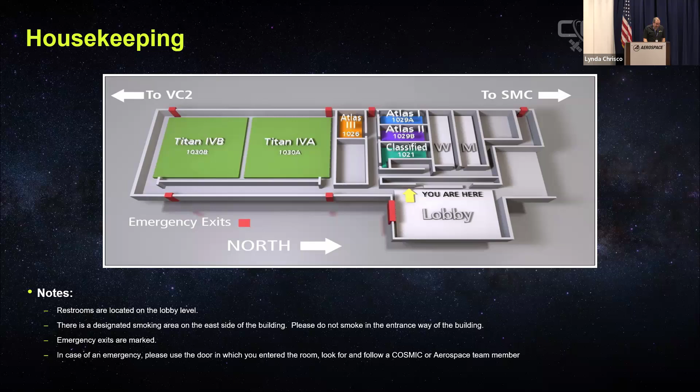I'm sure glad I'm in Colorado. Well, it's funny because, if you were on yesterday, the San Diego State students were here and their campus got rocked. It wasn't a huge earthquake, but it was big enough that it probably knocked some books off the shelves.

That's yesterday's schedule. Today, we're opening up with 2 teams from the University of Texas. The first team is Zenith Engineering Solutions from University of Texas at Arlington. And after them is the Miners from the University of Texas at El Paso. And this afternoon, we have a couple remote teams, and then Space Bender from right here, Cal State Los Angeles. Tomorrow, you can see we have 9 more teams, so it's a packed day.

If you're there, there's tours in the morning. You would have gotten emails from NASA about those tours and the rest of the event. But you can see there's actually 6 teams presenting in person tomorrow. I think this one is out of date. I believe one of the later Penn State teams is also presenting in person.

Okay. Cosmic background. We did this yesterday, so I'm going to do the abbreviated version. It's a consortium that's been established to bring together the community interested in space mobility and ISAM. Workforce development, that's the group Joey and I lead or facilitate. So far we've been mostly focused on C3, but also helping provide resources for people to learn more. We're looking at starting to develop this year an ISAM mini course, a self-paced curriculum so people can learn more about ISAM in a more organized fashion.

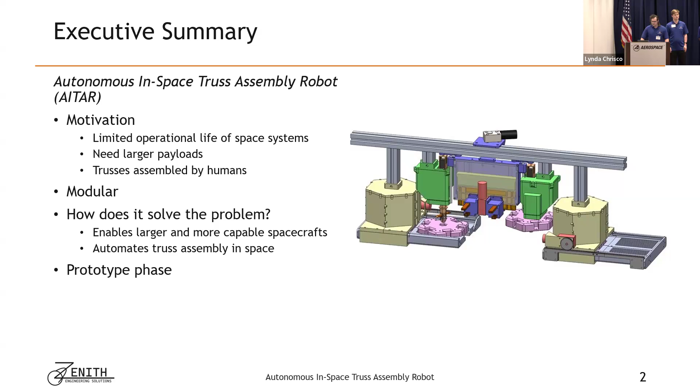Here's the team. From left to right, we have Spencer, Nevin, myself, Ethan, Nicholas, and Juan. We are all undergraduate seniors in mechanical engineering, and so our project is very much geared towards mechanical engineering.

Here's a timeline of everything that we've completed. To give you some preface, our senior design capstone project is structured in a way that our first semester is exclusively conceptual design. We finalized our conceptual design of the AITAR, as we are calling it, on November 21st. Starting this semester, we began to develop the entirety of the prototype, as we will see in the rest of the presentation.

The impact. We chose to focus on truss building because it's a clear gap between the vision of space infrastructure and the current state of the art. Huge constructions in space could play host to many functions and support work in space, such as the future Artemis missions and putting a man on Mars. However, the difficulty and expense of manual truss construction in space means that structures are limited to what can fit within or fold out from a rocket's payload fairing. We aim to realize the vision shown here, with in-space construction yards facilitating greater scope for the future.

This is the envisioned operation of our robot. Shown here is the digital twin that we've generated in CAD of the prototype, and we'll get into it further later. It can be launched into space and build a truss structure as large as needed. Once the structure is complete, the robot can return to Earth to be recovered and reused. Once the truss structure is built, it will be freed from the bus and can be utilized by whatever is in need. Shown here is the animation of our conceptual design.

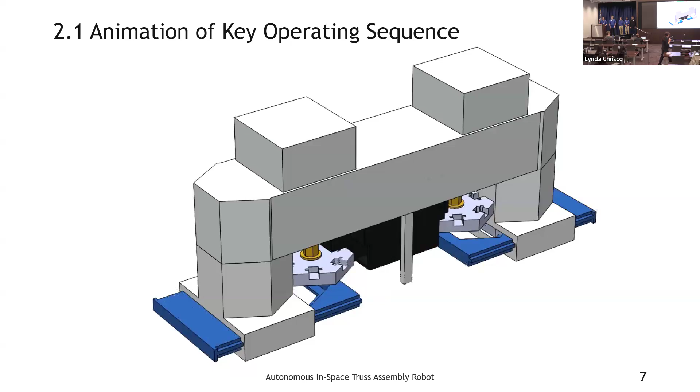You'll see the torque arm assemblies grabbing each truss element that we're calling the node and placing them into the build plane. Then the beam magazine in the center will lower down, place the beam between the two nodes, and use induction welding to fuse the thermoplastic members together. After that, the torque arm will then rotate the assembly and add another beam as needed. This can be continuously expanded as we have evacuated the build plane to build larger and larger structures, as long as you have materials to support it.

Here's the conceptual design broken into its sub-assemblies. In the blue, you have the node magazines storing and dispensing the nodes themselves with a tray mechanism. Moving into the yellow structures, we have the torque arms, the most complex of the sub-assemblies. This will be lowering a torque arm into the socket hole of the nodes themselves and then affixing it with tabs on the end. This will allow the nodes to be moved and also allow locomotion of the robot on the truss structure. In the center is the beam magazine. This is what will hold and weld the beams into place.

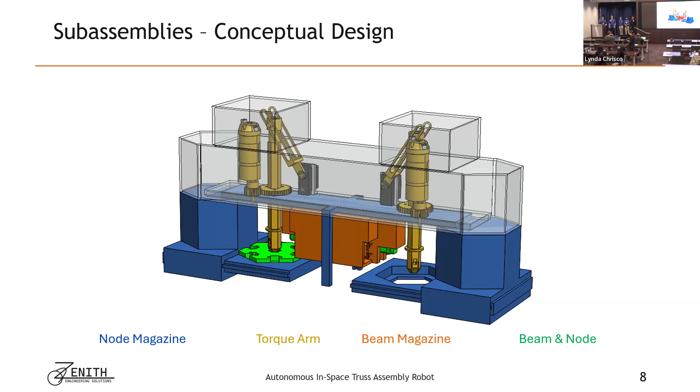It should be noted that the entire structure has been decidedly made out of aluminum 2024, as it is commonly used in space applications for its lightweight and high strength to weight ratio, as well as reduced fatigue. Now Spencer will start breaking down the sub-assemblies.

So this is our conceptual beam magazine as of November. Its job is to store and install the beams onto the truss assembly. It has a servo motor which rotates these pegs that you can see on the inside to isolate the beams, so as to have only one beam installed while keeping the remaining beams inside the magazine. It's translated using a ball screw and DC motor to move it up and down.

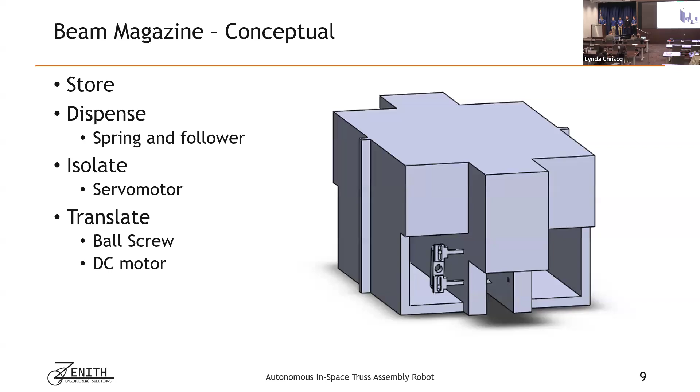This is a CAD model of our prototype, and instead of a servo motor, we used a dual shaft DC motor shown in red to control the pegs, and this was because the servo motors that we did have were too low power to counteract the force of the follower mechanism. Additionally, we used a rack and pinion mechanism as opposed to sliders for the pegs in the beam separator module because it's mechanically simpler for us in the prototype. We also have in orange these stabilizer brackets to prevent the magazine from twisting when the lead screw actuates.

And we have a video here of the magazine being actuated up and down with a lead screw. And for the prototype, we used a plain lead screw instead of a ball screw because of the lubrication requirements needed in atmosphere. And we also have a video of the module in action.

And as we can see, as the rack moves, it allows a beam to come into the loading position, and then that motion would occur right before it's lifted up, and then another beam is ready to be placed. And I'll hand it over to Nicholas.

So, the node magazine is used to store and dispense the nodes into position for the torque arm to retrieve them. It, like the beam magazine, uses a spring-loaded follower system to push the nodes down into the slot in the feeder tray, which is then actuated by a ball screw to move into the position underneath the torque arm.

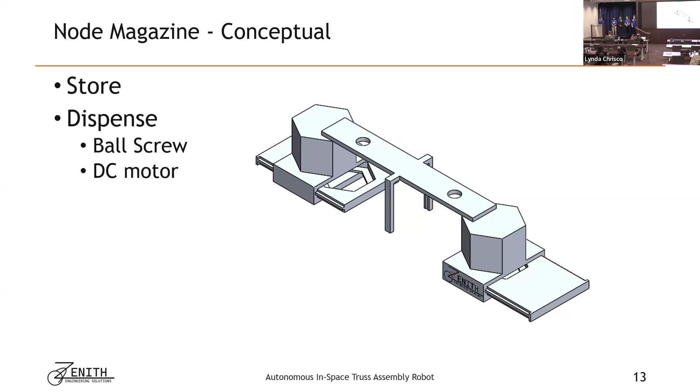For our prototype, we've had to make a few adjustments due to the complexity and expense of the ball screw. We've swapped it out in this on-the-ground, in-atmosphere version for a rack and pinion system. And then the follower is pulled down by a single constant force spring at the back.

And then the force is counterbalanced by bearings, 2 sets of bearings around the follower assembly, which ensure its continued horizontal position. And then there is also a cutout in the feeder tray to ensure that the torque arm can easily pull the node out of the feeder.

And then here we have a video of the feeder tray in action. Here the motor is going at 100% speed. It is much slower on our finalized and computer-controlled prototype.

The torque arm is the most complex subassembly in the robot. It must slot into the nodes that we use for our truss, secure the nodes, and also raise the nodes out of the feeder that slides out, slide them into the build plane, and then rotate these nodes in order to locomote across the truss.

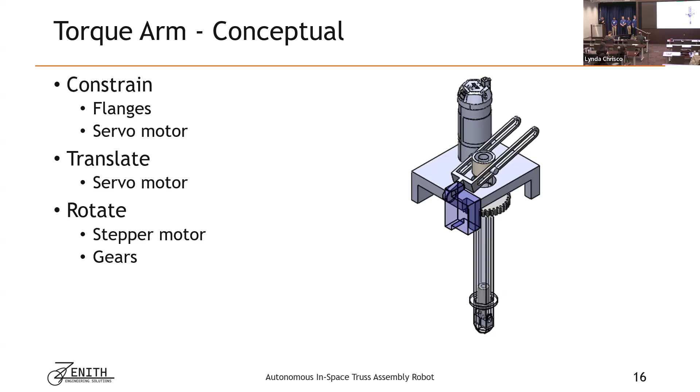Here's a picture of a CAD of the prototype. You can see the 3 motors that drive the torque arm: a servo in the top that actuates the flanges to secure the node, a servo in the pallet fork raises and lowers the arm, and the stepper motor connects to the gearbox and rotates the torque arm shaft. We learned that using a servo placed in the cab of the torque arm is most likely the best design choice for the final assembly.

Okay. So this is a video of our prototype of the flanges actuating.

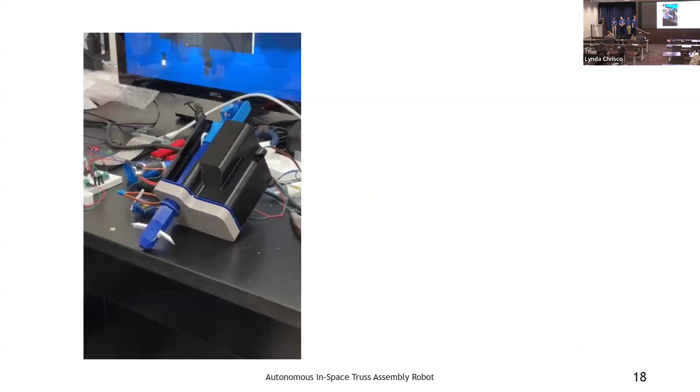You go back. Not in this one. Okay. I'll pass it on to Nevin to talk about the truss element.

The beam and node shown here form our truss structure. The node, which acts as the joint, has slots at 60-degree intervals so that we can form an equilateral triangle. They're both made out of carbon fiber reinforced PEEK. And we chose this material since it is resistant to microcracks from thermal cycling, has good resistance to degradation from radiation, and it is also a common material that is used in space applications.

The beams and nodes are joined together through induction welding. And the beam has metal implants, which melt the thermoplastics during the induction welding process. The method of joining is achieved using magnets in the prototype as compared to induction welding. We deem this more reasonable for prototyping, as we are just demonstrating the mechanical operation.

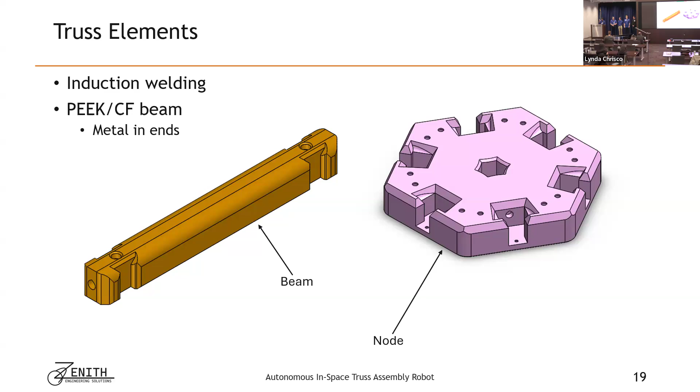So, now that we've seen all the individual components, we can look at how the overall assembly fits into the requirements of the competition. The conceptual design, without the rescale and any changes made to the prototype, fits well within the payload volume of the Venus-class bus. The mass is also well within our bounds.

The maximum power draw, which occurs during the induction welding operation, exceeds the maximum power supply of the single-wing bus, which we've designed our payload volume for. Therefore, we will use a supercapacitor to provide the excess supply for a momentary period in which the induction welding occurs. However, the regular power draw for all other operations does not exceed the 15 watts used in the torque arm rotation.

Our analysis of the conceptual elements also shows that they can withstand the forces of launch. We have three operations we selected to combine, namely the dispensing and alignment of our nodes and beams, their joining using the induction welding, and the robot's locomotion along the truss, all of which combine towards the larger truss construction ISAM capability.

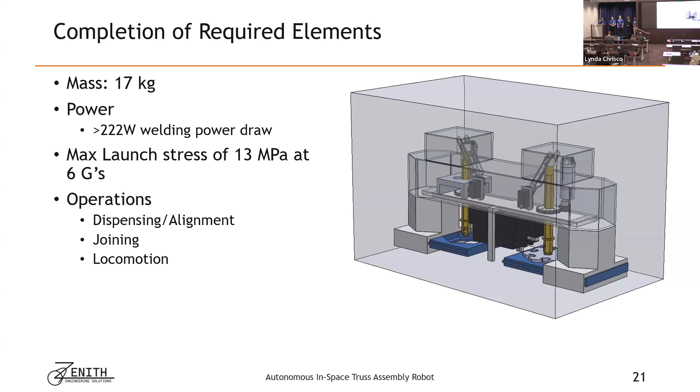Building the autonomous truss assembly robot is highly feasible due to the components used being fairly well tested and understood in terms of their history in space operations, and they're easily available. The basic operations have also been proven through the kinematics of the working subassemblies that we've built for our prototype. And we believe that it's a simple matter of programming it for automation, which means that overall, the design in total is easily feasible within the decade.

Building the autonomous in-space truss assembly robot within the decade. Oh, hold on.

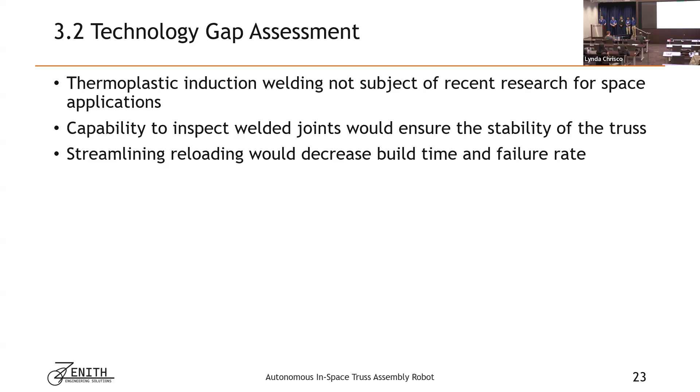Even though the mission is feasible, additional technologies could make the mission more effective. Welding of thermoplastics in space is a novel idea, and further developments in this area would improve the confidence in the mission. The ability to inspect joints, as well as reload the truss elements, are additional technologies that would amplify the impact of the mission. However, none of these technological gaps make the mission unachievable.

Some of the technologies that we tested or looked at for joining were fasteners, ultrasonic welding, adhesives, snap fits, and induction welding. We were considering snap fits for the majority of the design phase, but we abandoned it due to the strength of snap fits being low and their reliability in autonomous programming being low.

We ended up going with induction welding as it requires no tool contact on the weld surface. It uses EMF to heat the metal inserts inside of the beams. And this leads to a simple automation process. However, even in atmospheric conditions, induction coils require water cooling.

For linear actuators, we considered lead screws, rack and pinion mechanisms, and ball screws. The lead screw and rack and pinion were ruled out because they rely on sliding friction, which just is less effective and would affect our reliability in our system. Instead, we selected ball screws, which is an industry standard for space applications.

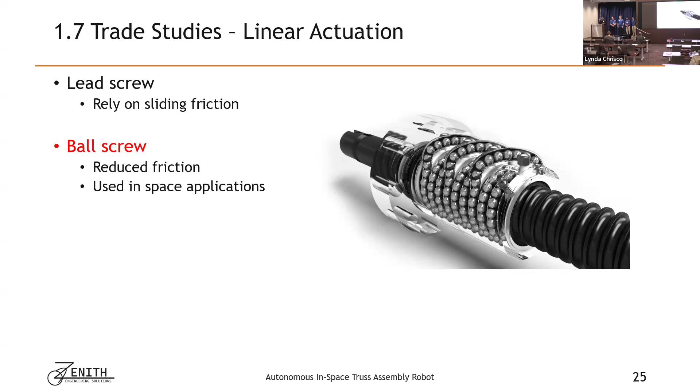Autonomous assembly of structures is not new when it comes to space missions that are under development. However, ATAR utilizes a unique assembly and locomotion operation that is significantly simpler than current assembler robots. The ATAR is also designed for on-orbit assembly as compared to building structures on celestial bodies. And it also utilizes induction welding of thermoplastics, which is a novel idea when it comes to space missions.

Some of the most innovative ideas that we considered include the ability to capture and deorbit satellites that had lost communication, repairing or replacing solar panels, and induction welding of thermoplastics. The complexity of satellite commandeering as compared to its need led us to not pursue this idea forward. And when it came to solar panel repair, there was a lack of interest in proposed solutions, which led us to not move forward with it. On the other hand, induction welding of thermoplastics is an idea that we incorporated into our mission.

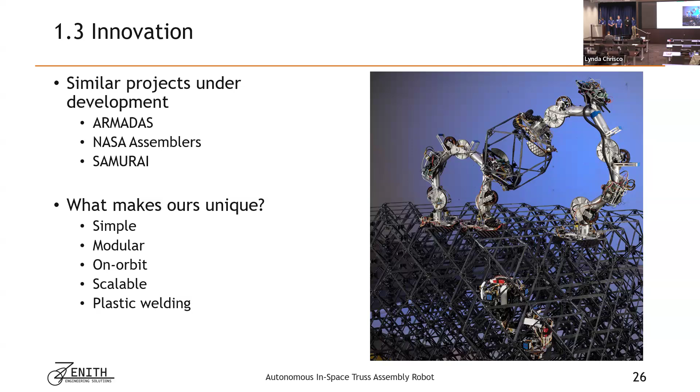All right. Risks associated with the robot's operations were ranked based on severity and likelihood of occurring. Misalignment of nodes and beams ranked as the most probable and severe, since this is mission critical and currently lacking closed-loop feedback. The failure of different actuators ranked separately, as they all have different actions. The failure of the torque arm would be catastrophic because, in addition to the mission failing, the robot cannot be recovered.

Impact of space debris has no designed countermeasures, assuming the debris is large and fast, and for this reason ranks high in severity. Electronic operations are commonly interrupted due to radiation in space. However, this is commonly remedied by the use of redundant systems.

Regular wear and tear ranks the least probable and severe, since the robot will only experience this after a long period of time, and the effects won't be detrimental to the operation itself, due to the fact that we are going to just bring it home and maintain it, similar to an airplane. Events considered in regular wear and tear include off-gassing of lubricants and material degradation in space over time.

The data handling and comms is really quite simple for our robot. It does not require any real-time activation, could be constantly observed or piecewise depending on the operator, and the operator is only needed for initialization and updates if desired. This allows a low bit rate. Through brief skimming of systems, we determined the AstroDev Lithium 1 to be the best choice, with 9.8 kilobits per second at 48 grams and a low power draw of 1/4 to 4 watts of power.

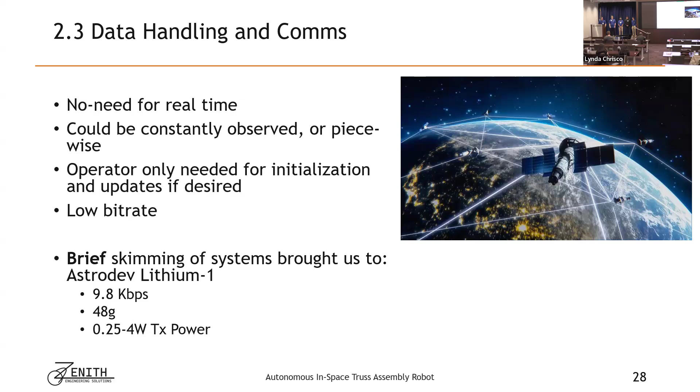The biggest challenges that we encountered during the first stages of development were: we realized that the assembly is interfering with the truss structure and inhibits expansion. This issue was resolved by designing the robot in such a way that all parts can be evacuated from the build plane. An additional challenge was the high power required to weld metal trusses, which was later replaced by thermoplastic truss elements. The low power specification caused some worry at first and led to the development of a robot that can operate in separate stages to prevent high power consumption.

Shown here is one half of the full prototype design. On the left, you see the node magazine. In the center, the torque arm, and on the right, the beam magazine. We're currently implementing new systems, or the same systems but getting them to work, and we have another 3 weeks to make sure that this is fully operational.

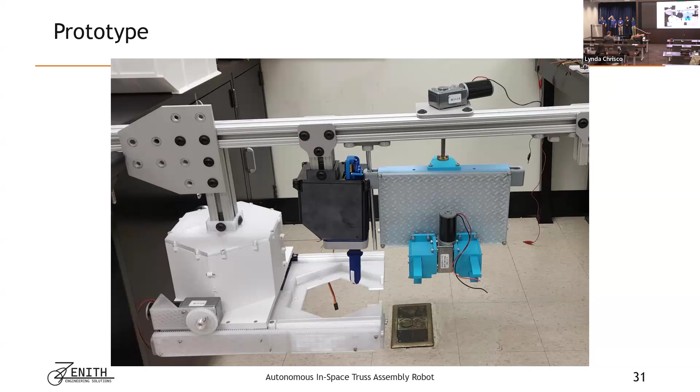Our paper further details our decisions and motivations behind each thing, as well as detailing the trade studies that we performed. The abstract is 163 words and the entire paper is 13 pages long, where we reference 26 works.

The path to PDR shows that we plan to design the launch configuration for the robot to fit within the bus itself, add disassembly and reloading functionality in order to increase the use of the robot, and do true environment testing so that we can understand the resistances required for the locomotion of the robot to not inhibit any movement of the bus and the truss structure, and to understand further the thermal loading and strategies to adjust for such. Also, we would need to rescale this prototype to fit within the bus and assign space-rated motors, as well as adding closed-loop feedback.

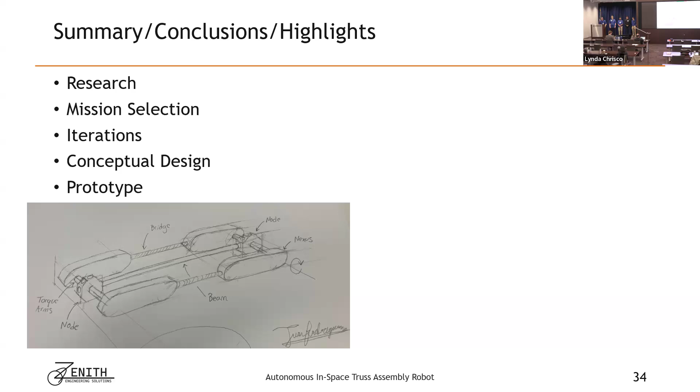In summary, the team started out by researching the space environment and getting familiar with ISAM. After gaining some insight into the current state of ISAM and a general idea of the space environment, the knowledge was used to select a mission that was novel, feasible, and applicable. Once a mission was selected, the design was refined through several iterations and landed on the conceptual design. A prototype of the conceptual design was built while making changes to facilitate this process. Shown here, you can see the initial hand sketch, kind of back of the napkin, on the first day that we thought of this idea, all the way to the final digital twin of the prototype shown above. Are there any questions?

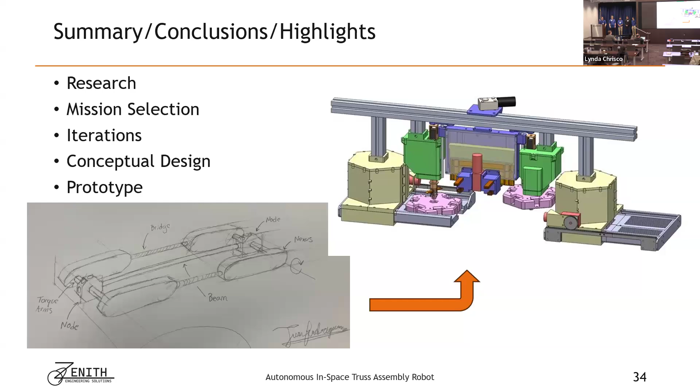Okay, let's open it up to the judges for questions. Hey, I'll go first, if that's okay. So this is Lieutenant Griseric. I work here in Space Force.

I asked a similar question yesterday, but is there any consideration of what you'd have to change about the payload design to work in LEO versus working in GEO? Let me repeat the question so I understand what you're asking. Was there consideration of the differences in design for working in LEO and GEO? Is that correct? Yes.

So we found that in LEO we have a much higher temperature fluctuation as well as radiation bombardment, although that's about the same. When it comes to the temperature fluctuation, it would fall in the same idea. Considering the aluminum 2024 is well tested and holds up well to fatigue, we did consider a different material, aluminum 7075, but we're not sure that it would be much different. Overall, I'm not sure that the design would have to change all that much, as the truss structure itself would also hold up well against radiation bombardment, as we see very little degradation of the material. Does that answer your question?

Yeah, great answer. Great presentation too. Thank you. Thank you so much. Hey, yeah, guys, if you... go ahead.

Yeah, so the question I have is, you're clearly using magazines of your material. Did you guys discuss the options for reloading those, or have you thought through any of the options to make sure that you don't get limited on orbit? Yes, so we did consider different abilities to reload nodes as well as beams. We figured that is a very obvious path towards the next consideration, and it seems very feasible, as you can just add some sort of a gate check valve mechanism.

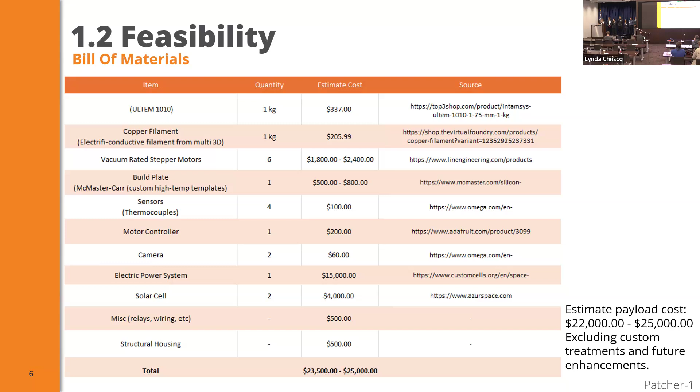For instance, the PEI substrate offers thermal stability and printability, while our conductor material was chosen for high radio frequency performance with lower power demands. In addition, we estimate the cost of the antenna measuring 6.5 by 5.5 centimeters at $26.81 per unit. The dual-use robotic arm not only prints but also positions and installs the antennas, which helps reduce mass and simplify mechanical systems, optimizing power efficiency.

For innovation, I would like to demonstrate different technologies that we found that can demonstrate what we want to do. So there exists a company called WASP that integrates 3D printing technology into the robotic arm. So we know that this is feasible. Also, we found research into fully 3D printed patch antennas. So we know also that patch antennas work.

And we found very interesting research on the proposals of Mitsubishi Electric. They propose an antenna; they can make one antenna out of resin in space. And there are other similar proposals that manufacture large components. So the novelty in what we want to do is we will have the robotic arm that will be capable of gripping the patch antenna and installing it.

To make sure we meet the required elements, as my teammate said, we selected the dual array, which we had that constraint of volume, and we created a CAD model to make sure everything fit in that space. Also, we decided materials for the robotic arm, and we encountered the mass for the filaments and extra materials that we're using. And we met also the requirement.

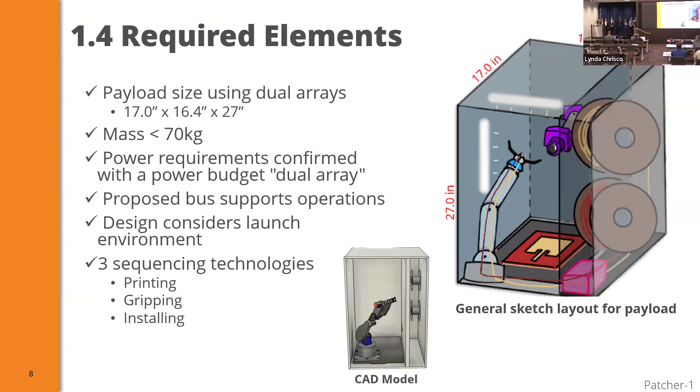The other one we would like to point out has a low likelihood of occurring, but also has a high impact: when our deorbiting mechanism could fail. So the way to mitigate this one would be to make redundant deorbiting systems to make sure that it is very reliable.

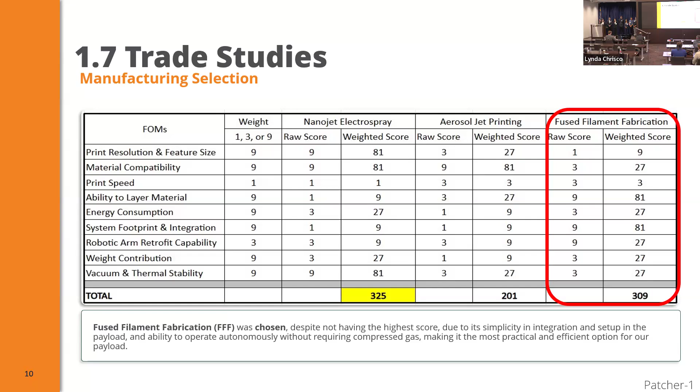After deciding on the fused filament fabrication method, we needed to concretely decide what antenna we wanted to make. Feasibly, we couldn't make all of these onto whatever payload we would have, but to keep things simple, we wanted to stick to one. In this case it was the patch antenna, which won due to ease of printing and material efficiency.

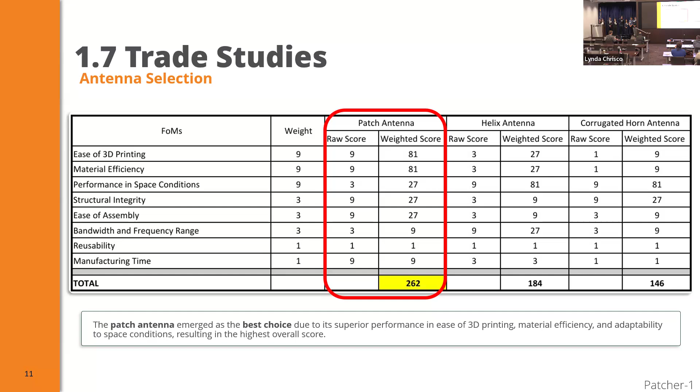The patch antenna has three main layers. The ground layer will be of the electric material, then we have the substrate, and then we have the patch layer. Depending on the satellite, the area of the antenna can be modified. A larger area will give a lower frequency, and the thickness of the substrate will affect the bandwidth.

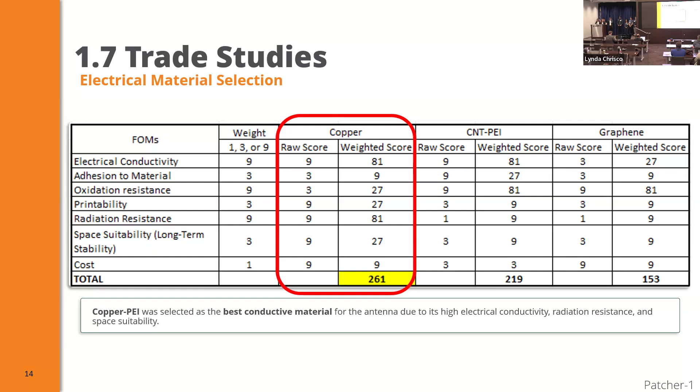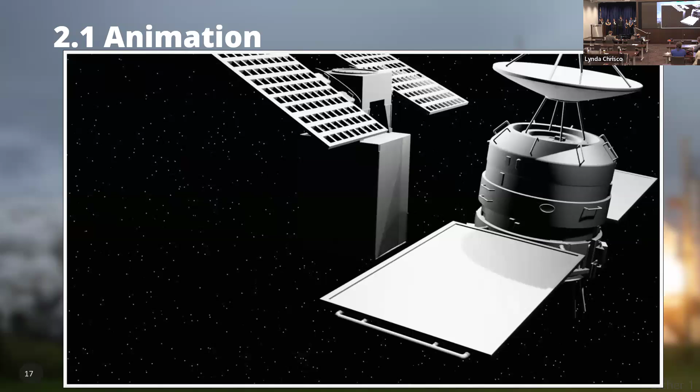Now in the following video, we'll see an animation of the mission of the payload. Here you can see the payload reaching out to the satellite where the patch antenna will be placed. After that, you will see how the arm will start 3D printing the patch antenna inside the payload. It can take a while. There you go. You're going to see this from inside the camera that we installed inside our payload. After the arm finishes 3D printing the patch antenna, it will start picking it up and taking it out of the payload to place the patch antenna onto the desired satellite.

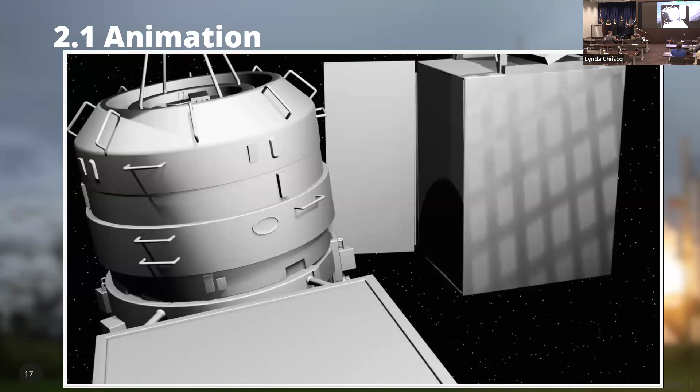Once it deploys our payload in LEO, we're going to make sure that communication between Earth and the payload is secure. After that, we're going to send information to the payload. This will be the G-code for the 3D print. After we finish the 3D print, it will start taking off the patch antenna so it can place the patch antenna on the satellite. After that, we're looking for more satellites to place the patch antenna on, and after that we will redeploy the payload to Earth, so we can recover it and do more missions with it.

So even though the payload is fully autonomous, we still need real-time downlink for monitoring the 3D printing process. Sensors and cameras will help us verify that everything is working properly. We don't need an observer on board, and we don't need a full-time operator. We just need occasional ground interaction if something goes wrong. During operation, the total data rate peaks around 1 megabyte per second.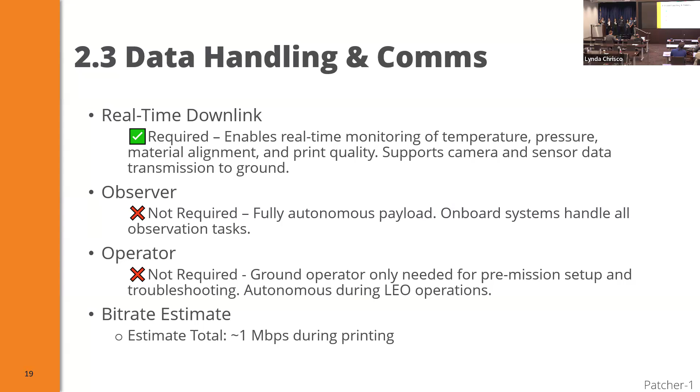And we are not designing the communication system, but we do have clear requirements. It needs to support real-time downlink, have a reliable command uplink, and be able to buffer data when there is no connection. It also has to work within our power and volume limits and handle LEO's extreme thermal and vacuum conditions. Basically, it must be efficient, autonomous, and reliable.

Some of the innovating concepts we had was a multi-purpose robotic arm, which we did pursue, which has an effector that grips and is able to install an antenna. One thing we didn't pursue is solar sintering. This was an idea we had later, but we think that this could make the antenna have higher quality signals. And as we mentioned, we also found out the nanojet electrospray, which is not polymer based and will get comparably less off-gassing compared to the fused filament. But we also didn't pursue this concept.

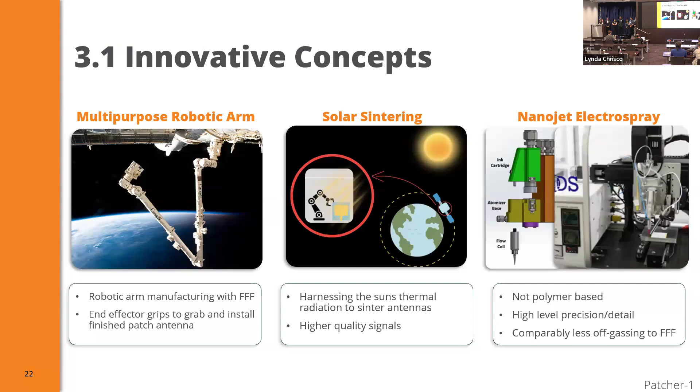Some of the tech gap assessments that we have is even though we have space grade filaments, there could be a significant improvement in the required energy. Or also, as I mentioned, there is off-gassing, so it could be an improvement there. Also, the power and thermal management, we can definitely have an improvement because we are having really high temperatures, and also in situ antenna performance validation in space.

So for this concept, the biggest challenge was the concept itself. Initially, we did not know what to choose for the first few months. We first thought of making a recycler robot that would get scraps from space to make whole new satellites. The other one, we were heavily inspired by OSAM 2, which was building superstructures, but we did not know what to do with those superstructures. So as a team, we couldn't really latch onto this idea. Eventually, with talking with our mentor, we discovered we did really like the idea of manufacturing. So we geared towards the idea of printing antennas for a more specified use.

After we came up with this idea, it was really hard to make it actually innovative. So what we originally thought was just getting a 3D printer and a robotic arm, both separate systems, and they would work in conjunction. However, we then figured we could combine them both and have the robot both 3D print by opening the claws and also be the manipulator itself to install them later.

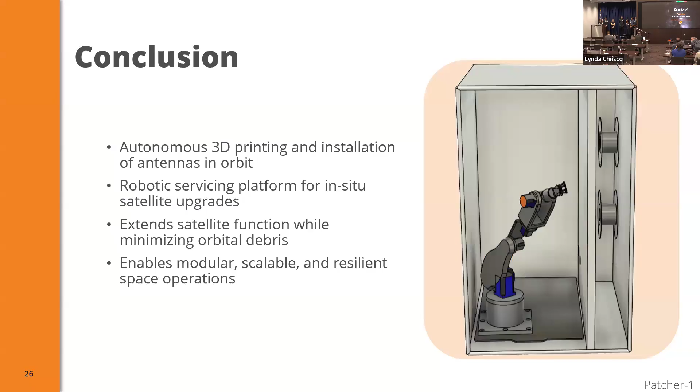Yeah, so we have two nozzles. So the two materials are in our payload. Okay, and you have to build the copper on orbit? No, we found a copper that is already a filament and is used already in this type of printing, fused filament. Sorry, that's what I meant. So you'll use 3D printing to create the copper plate. Oh, yeah.

Okay, and then has anyone done this where they had to deal with the different thermal properties and the adhesion and issues like that for an antenna? Yeah, we found one article where one antenna was fully 3D printed of metal, and we found another one that was a fully 3D printed antenna, even though we didn't find one that combined both. But that's why we are implementing also the build plate, to handle these high temperatures.

What kind of issues would you foresee in having this combined polymer copper fabrication process? One being outgassing, and then Ultem does work with adhesion to copper. So I don't see a problem combining both. Okay, thank you. Thank you.

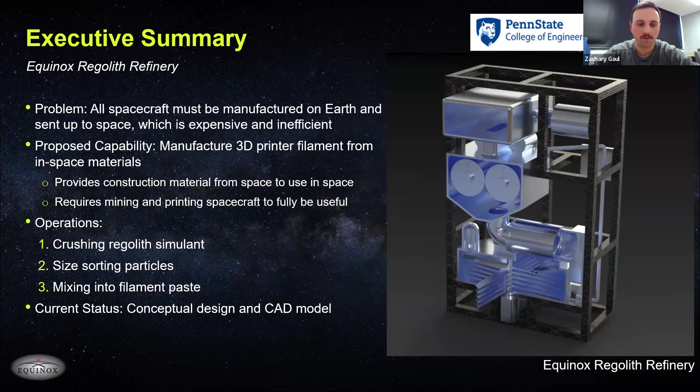So next slide here. Before we get down into the details, just want to reiterate, my name is Zachary Gaul, but also on our team we had Fedi Borky, Sean Marino, Peter Bachman, Blake Monska, Srisharan Srinivasan, and Devin Thomas.

So next slide. We started our project back in August, our first day of fall semester in 2024. And that whole semester, what we did was basic introductory research on ISAM. What is in-space assembly and manufacturing? And what area of ISAM did our particular team want to focus on? So once we did our trade studies and chose our area of focus, we then defined our system requirements, the objectives that we wanted our payload to accomplish, and then did final trade studies to get down to a good conceptual design idea.

Moving into that spring semester, we broke down our system into smaller subsystems, conducted trade studies on those, and then came up with our final conceptual design that we're sharing with you here today.

Next slide. So for our initial brainstorming concepts, we wanted to use the full diversity of our team. So we broke our team up into 3 separate little teams, and we came up with 3 early innovative concepts. And these used a variety of different technologies.

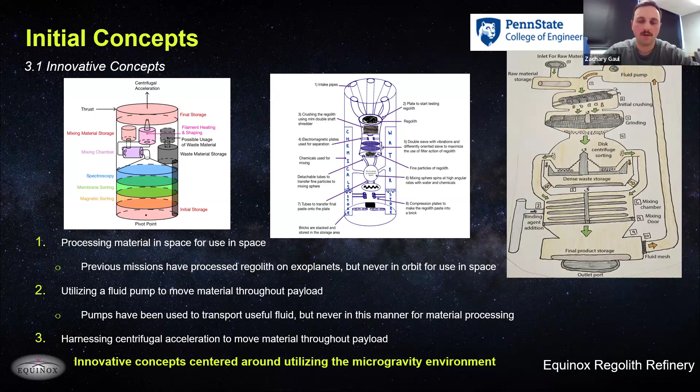So after we had these 3 concepts, we came up with a bunch of different assessment criteria. We weighted these criteria based on how important we felt they were to achieving our overall mission goal of providing the ability to use uniform construction material in space. Concept 3, as shown on the last slide, had our highest weighted sum based on this assessment criteria.

So we utilized that concept going forward, and also drew the best parts of those first 2 concepts as well, and meshed all of this together into the conceptual design that we now have as the Equinox regolith refinery.

So, looking at our overall mission architecture to start, we are utilizing the SpaceX Falcon 9 rideshare program. Our first phase is launch, and then we will arrive on orbit. Once we're on orbit and we have our payload in that Venus X-class bus exactly where we need it to be, all we have to do is send up a single activation signal, one uplink to activate that payload.

That internal payload is going to carry out all of those actions, and we will cover those actions in a separate architecture as well. And then once it's done with that, we will send a verification signal back down to our ground station in Alice Springs, Australia, the ground station location that we chose for this. And once we have that final verification signal down, we go ahead and we decay our orbit.

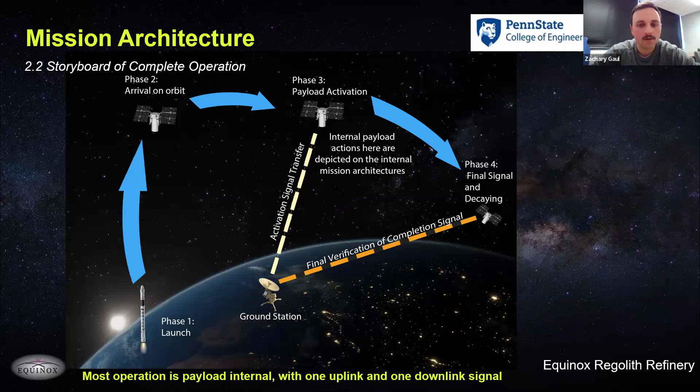So after it leaves that initial storage, we bring that regolith down through a roll crusher. That takes that regolith down into uniform particle sizes that make it easier to then sort that out inside of our centrifugal sieve, which is our next step there. After that material is sorted by its density there through that centrifugal sieve, we then take that down into our mixing chamber, combine it with our binding agent, and then that then goes down to our final storage.

Now, all of this material is being moved through our payload using a compressor and a pump. We suspended our regolith material in a nitrogen gas. So that is the fluid helping us move this through here in our microgravity environment. And we are also utilizing hydrogen that we can use as a binding agent to have that fluidization to cause that solid material to become more like a fluid.

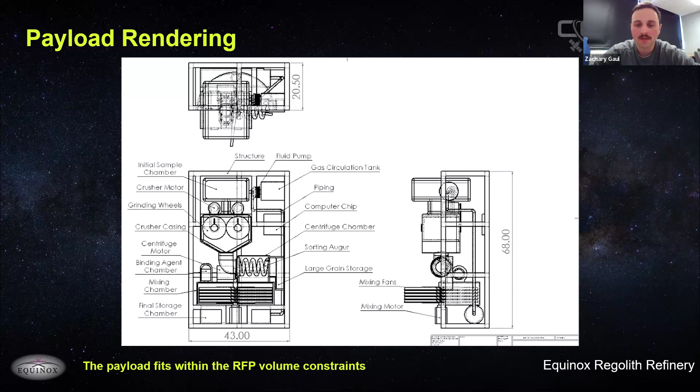We also went ahead and we did some structural and thermal verification. This is one of the biggest benefits of having that detailed functional CAD model, is that it gave us good interpretation based off of our thermal distribution and how the finite element analysis was going to look for this particular payload. We decided that we needed to wrap our payload in a silver Teflon, and that gave a cold case exterior temperature of minus 77 degrees Celsius. Because we were experiencing temperatures all the way from minus 77 up to 47 degrees Celsius as well internally. So the heat generated by those onboard electronics is going to be the main cause for bringing that payload up to that local maximum, that 47.85 degrees Celsius that we mentioned.

So further looking into the structural analysis side of this, we realized that we needed to have a carbon fiber reinforced polymer payload, and that payload that we used there was just going to deform on its own based off of our launch loads that this payload was going to undergo launching on a Falcon 9. So the aluminum bus structure maintains a safety factor of 1.4 under those Falcon 9 launch loads, which is roughly 5,000 newtons. So with that rigid connection between those two, we can go ahead and ensure that structural integrity. So we found all of these different structural and thermal verifications based off of these different studies that we did here as well.

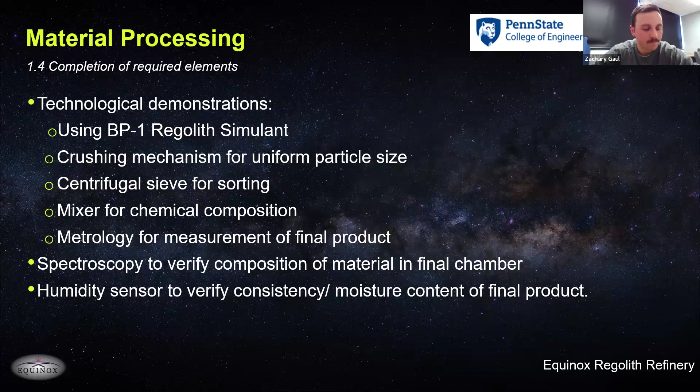We did various trade studies, and all these trade studies were for our individual subsystems. We had all of the basic subsystems that would fall under a normal NASA systems engineering small satellite space system, or subsystems, correction. But we also had our unique ones with the crusher, the sorter, and the mixer as well. So just our basic trade study on our crusher here showed that our roll wheel crusher was the best fit for us. So that is why we chose that based off of our data shown here.

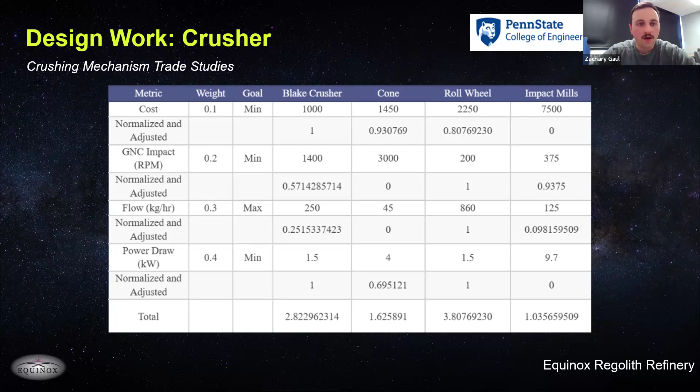Our structures trade study showed us the idea that we talked about earlier based off the carbon fiber reinforced polymer versus that aluminum 6061 T6. So based off of this trade study, we found out that we are going to do that rigid mountedness. We need that aluminum as well because we don't want that carbon fiber polymer to crush under those loads, and the benefits of each one of those. We found that out during this trade study.

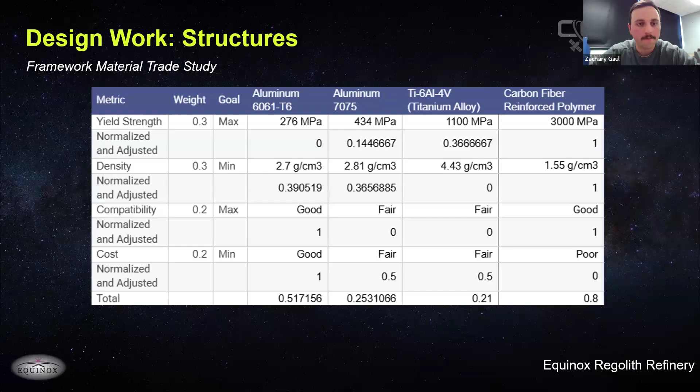Once that compressor is activated, we do our crusher, and then we do our centrifugal sieve, then we do our mixer, and then we go ahead and extrude that to our final storage, and then we do our final verification. It's a very sequential order here, and we'll talk a little bit about that with our risk analysis, but this was the easiest method that we chose, also based off of power requirements. Because of the power draw of each one of these individual systems, it was most beneficial for us to have intermediate verification steps along the way and process this material sequentially.

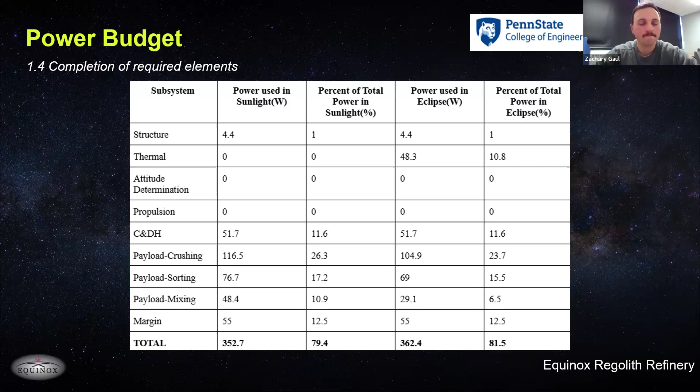Now, if there's failure codes throughout there, our mission is set up to do multiple orbits. And so therefore, if we don't get a good verification or prerequisites are not met on our first window of communication with our ground station, we do have multiple opportunities to go ahead and execute that internal processing on future orbits. So we added that in as well as an added redundancy there.

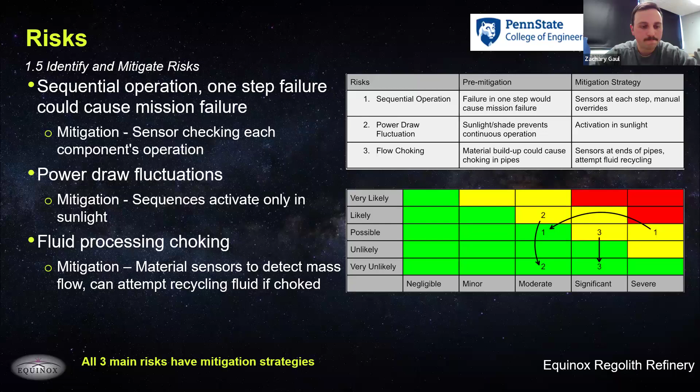What would benefit our particular payload moving forward? Well, definitely asteroid mining or different surface mining spacecraft. That would definitely help boost the need and the advancements in this particular area of ISAM. Having those spacecraft be able to mine the material for us and deliver that material to our refinery would be a huge impact to our specific technology.

Also, advancements in our 3D printing. Since we decided to make a 3D printing filament, we found that having that 3D printing capability allows you to essentially build anything you can dream of based off of the limitations on your specific 3D printer. So not having limiting factors on those 3D printing machines would allow our payload to have an even greater impact. And then also servicing our payload as well; the ability to inspect and perform maintenance would advance the lifespan of ours as well.

I already mentioned some of the challenges that we encountered here. We are in microgravity, so we needed to move materials with non-traditional methods. That's why we are suspending and using the compressor. We have high power draws, so we need to focus exactly on what time we're activating these payloads. And then also implementing this with the Venus X-class bus. It was almost like a blank canvas with a few constraints on us, but based off of our internal processing of our payload, it allowed us to be very unique with those integrations.

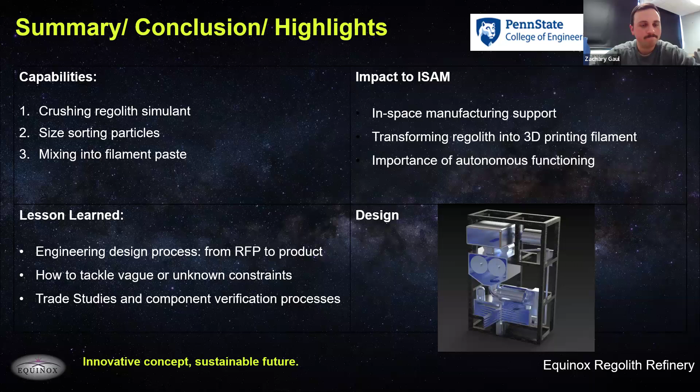So in conclusion, I just wanted to highlight our key capabilities: crushing that regolith simulant, sizing that simulant down, and mixing it into a 3D filament paste. We have a good conceptual design here. We have a working CAD model, and we think this is super important to ISAM and our future as humanity, being able to move off of planet Earth and have a future in space amongst the cosmos. And with that, open up for questions.

Okay, perfect timing. And judges, if you have any questions, go ahead. Hey, it's John Vickers. Can you hear me? Yes, sir, I can. Hey, Zachary, John Vickers from NASA.

That's an excellent presentation. I might not have heard it earlier, but I heard at the end that you had considered the effects of microgravity. As I was listening, I was thinking about that. Can you explain a little bit more about where you thought microgravity might cause you some problems?

Yes, sir. The biggest thing that we figured out with microgravity is if you look at different pump systems on Earth, all these pumps require pump head, some sort of pressure upstream of that pump, in order for that pump to operate properly. So to counteract this in microgravity, we figured that we would need a physical, mechanical ability to push this through if we didn't utilize the properties of a fluid.

So by utilizing the properties of our fluid and suspending our regolith inside of that fluid, we are able to compress that fluid down and pressurize it. And by having a 30 psi absolute or 15 psi gauge pressure inside of our system on launch, we then have that pump head, that pressure that would be required in order to allow these pumps to operate here.

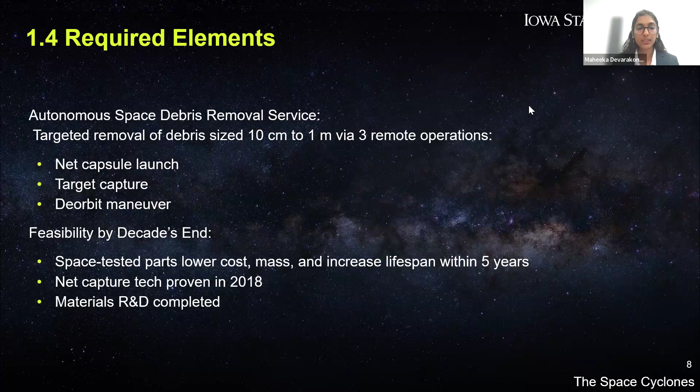If we move on to the next slide, we'll see that our solution also meets all the size, weight, and power constraints of the Venus bus design challenge, as can be seen. And for considerations of operating in space, the initial net capsule launch will be soft launched in order to reduce any Newton's third law reaction forces. And the capsule will then pilot itself to the space debris.

With this solution, we also avoid the problem of tumbling in space, or at least reduce it, whether it be the tumbling of the host or the debris, since we do not provide a tethered solution. Our proposed solution is also cost-effective, with the highest estimate being around $15,000 for the payload alone. The reason that we have such a vast difference between our highest and lowest estimate is through sacrificing some of the quality of some of our components, such as the LiDAR array. We aim to use the state-of-the-art products as much as possible, which do end up costing more.

So if we move on to the next slide there, we can talk about some of the risks that our team has taken into consideration. With our main objective being to deorbit cube satellites and debris from low Earth orbit, we must also have the ability to avoid other debris that may hit our platform. We must also avoid failure as much as possible, since we don't want to add on to that Kessler syndrome. And so we want to reduce that probability to zero.

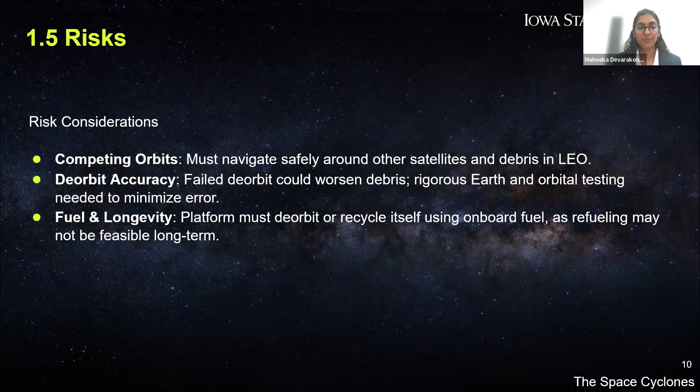With fueling in mind and the fact that fuel costs a lot and we have a very limited amount on board our platform, we must also plan to deorbit with whatever fuel we have. And with that, I'll pass it on to Daniel, who will be going over the path to PDR.

So as part of the path to PDR, we have two different main types of testing that we want to do. We want to do functionality testing and feasibility testing. Functionality testing is more a proof of concept that we can do the things that we're saying we want to be able to do. These are motion, tracking, and prediction of the target object, the projectile guidance of our Cyclone capsule, and the reload and refueling procedures required for reuse.

For feasibility, this is about operating within our environment. This is in regards to launch testing of the design. How do we get it to space? This is vibration testing and heat testing. Vibration testing being done with a vibration table, and heat testing being done primarily by looking at what has been used in the past and how they have fared, as well as zero gravity testing of the design, which we are working on prototyping in a two-dimensional environment, so a flat surface or frictionless surface, but in addition to that, additional testing via parabolic flights or drop testing.

Some of the things that we looked at when designing this are, as stated earlier, we went with an untethered net design. Part of the steps to that was we initially looked at using a robot arm, because that would allow us to have fine control. However, the biggest con with that was we were extremely worried about it breaking due to the mass and inertia difference when actually connecting to our target object. And we determined that we weren't capable of designing around that with our limited knowledge space. In addition, with the tethered design, the tether would allow it to be completely reusable, but the entanglement and potential loss of the main craft would draw us away from that.

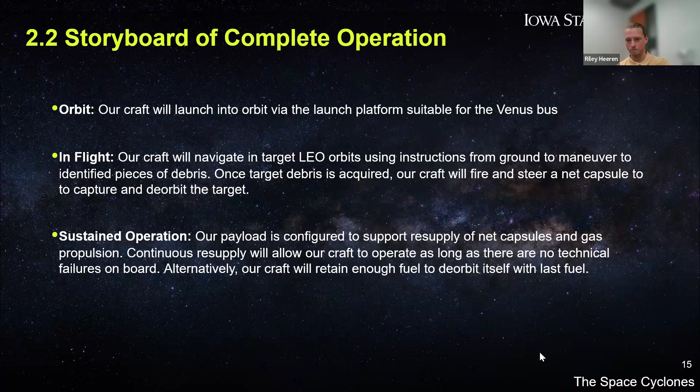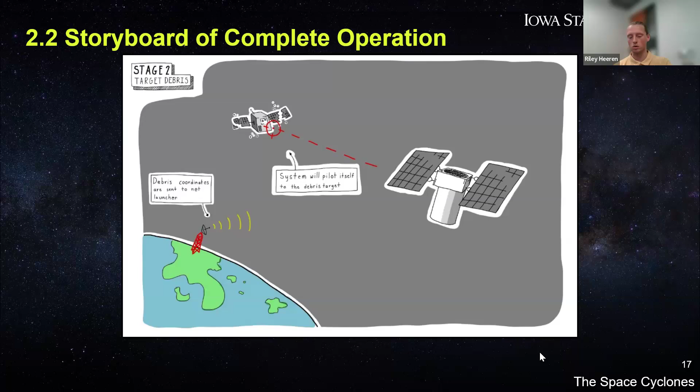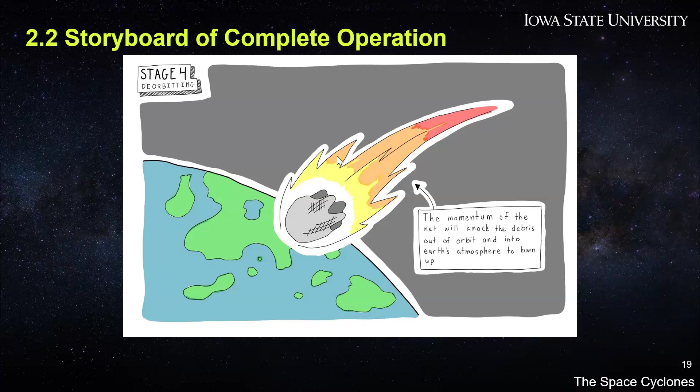So as part of the data handling and communications aspect, as stated earlier, we want to restrict ground communication to a minimum to remain as autonomous as possible. As Maheeka stated earlier, this boils down to only really communicating the assignment of a target and updating its status. This will include the size, mass, location, and velocity of an object in order to perform a sanity check to autonomously determine the feasibility of actually capturing this target, and also making sure that it doesn't conflict with any execution times of other planned missions.

As stated, we will have a fully autonomous mission operation with our built-in observer, which will be capable of tracking and predicting the target's motion, launching and guiding our Cyclone capsule to capture the target, and directing the captured target to its accelerated deorbit. Now I will pass it off to Tanvi.

Thank you, Daniel. I will be talking more in depth about the more innovative concepts that we as a team developed through November. The first one was manufacturing metals in space using 3D printing. Our design aimed to capture the debris in space and melt the metal down into components for different services.

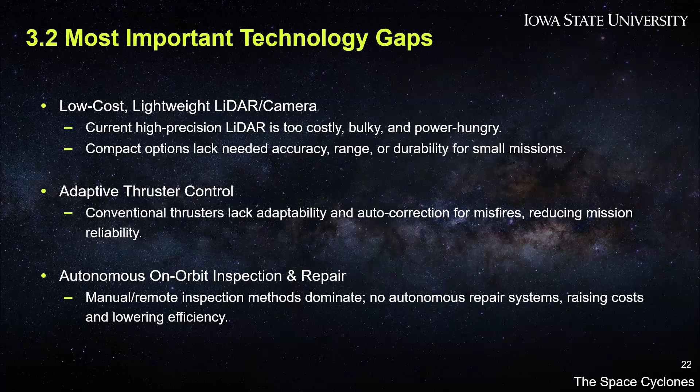The biggest challenges that our team has faced, the main challenge that our team faced was limited aerospace background. All of us do not come from an aerospace engineering major, so it was very difficult for us to research propulsion, thermodynamics, and space materials.

We also faced constraints with weight and power. Tight budgets required careful component selections and trade-offs to balance performance. Our LiDAR was a prime example of this. We also faced challenges with design complexity, especially in integrating different subsystems like mobility and sensing. Balancing modularity, reusability, and reliability in such a compact platform was not trivial and required multiple iterations.

The last was thermal management, which posed a serious problem. Space presents extreme temperature shifts, and we lacked extensive design experience. We relied on passive thermal techniques and had to carefully select materials that could endure harsh environments without the need of active cooling. I'll pass it on to Ben for explanation of the prototype.

All right, so now looking at our physical prototype, as John mentioned at the very beginning, we had other requirements as this project was offered through our Capstone course. So we had to make a physical prototype anyway. So what we did is we've simplified down to a 2D space and focused on the mechanical side and the electrical side.

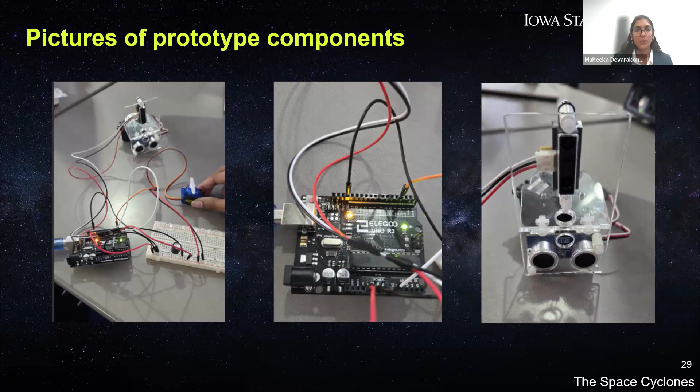I can take that question. A lot of our research really went into the LiDAR array, and we found some very interesting LiDAR arrays that are now state of the art, which are also integrated into a camera. Our main goal is to avoid errors as much as possible, and so the greater our LiDAR camera is, the better our precision model. Therefore, as an electrical engineer, I would put my money mostly on that LiDAR array. Everything else is just a cold gas thruster. It's a net. These are all very set components that have no scope for really improving. Does that answer your question? Yes, thank you very much. Thank you.

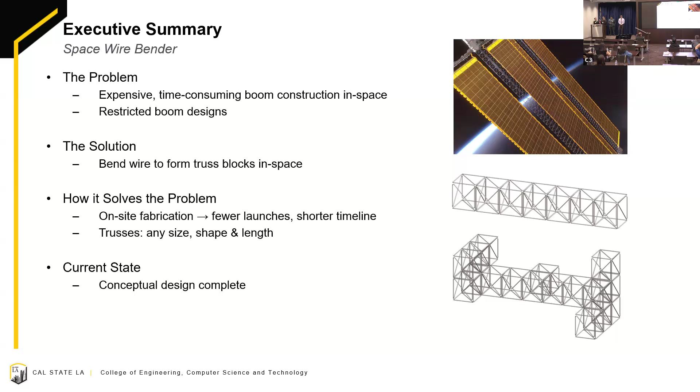Okay, so the capability of this technology is to bend wire to form truss blocks in orbit. So what that means is, in order to do that, we'll have spools of wire up to 400 feet, which are loaded into the payload. And by a series of operations, 1, drawing the wire, 2, twisting or rotating the wire, 3, bending the wire, and 4, cutting the wire, we are able to make these truss panels or truss blocks.

In addition, we have subsystems which are split into each operation. So we have the feeder, pull; rotator, twist; bender, bend; and cutter, cut. So as mentioned before, we can make blocks, 3D and 2D shapes.

And I just want to start off with the impact. So this technology is critical for the ISAM community for a couple of reasons. One, it enables or is the first step to creating modular booms. So that's important because now you can get booms, and let's say you want to make it longer, you can add a couple more blocks to it to increase its length. You can also make it wider, besides making it longer. And in the situation where a boom gets damaged, instead of replacing or scrapping the whole thing, you can simply replace the block that was damaged.

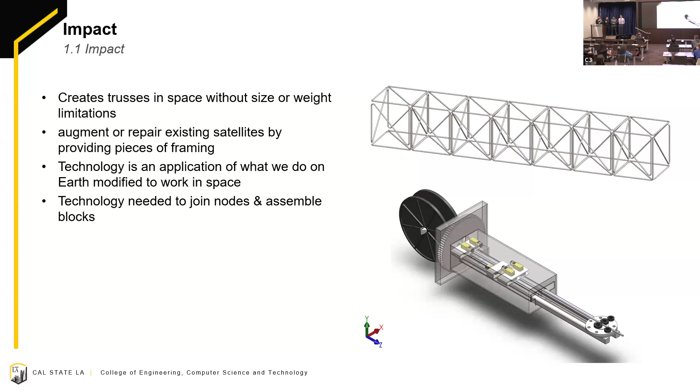The entire system, when it is in its compact form, has a length of 26.5 inches and a width and height of 11 inches, as well as only weighing 58 kilograms when loaded with a spool, far under the 70 kilogram limit we were provided with our bus.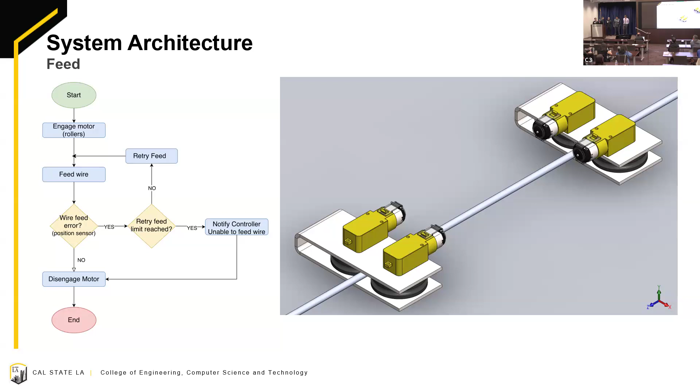Ultimately, we decided to opt for the spool arm and gear. So that is turning the spool externally. So while it has a higher mass and volume footprint, it provides the best torque and it holds the spool. And here is a picture of the actual mechanism. So as you can see, there's an arm which holds the spool in place, and that's connected to a gear which rotates and is powered by a motor. On the left-hand side, we have a process flowchart of the rotation.

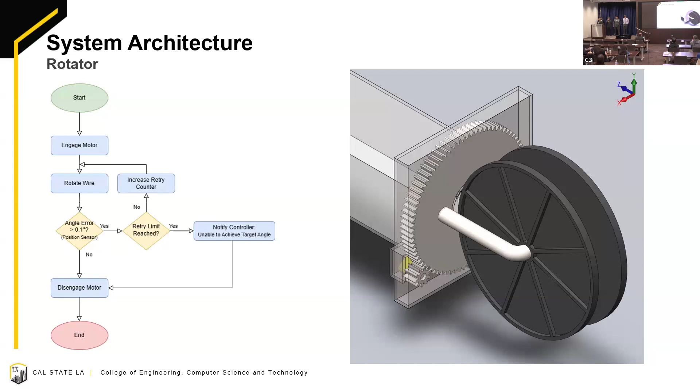Slide. Here we see a similar flow chart to the previous 2 systems, showing the process in which we complete a bend. On the bottom, we can see the full bending head with its extender fully extended, showing the full length that the wire would need to go. The bending head can rotate both clockwise and counterclockwise, ensuring it is very versatile in its usage and its ability to complete bends in 2 directions. Thank you.

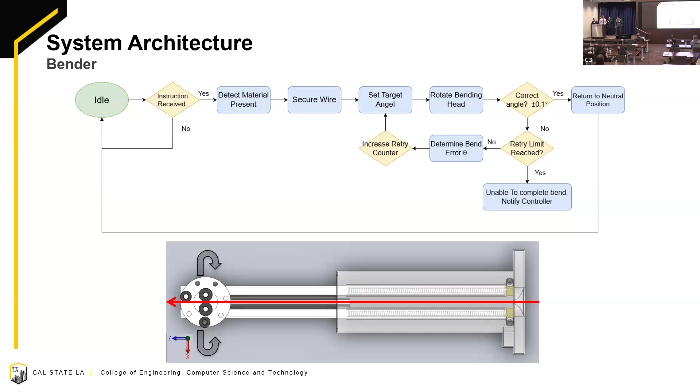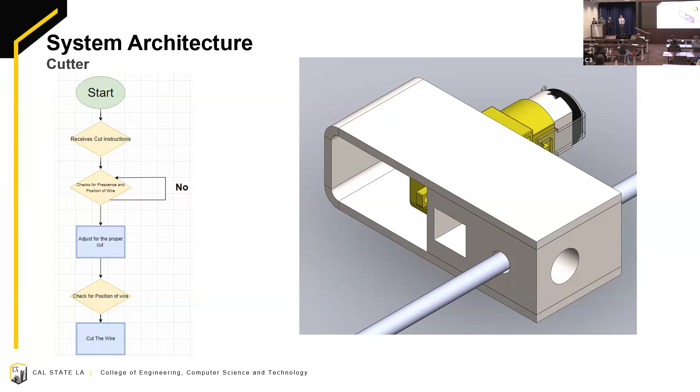Next slide. This is what it looks like. You can see the wire passing through it. It's very simple. It will receive the instructions to cut. It will then begin checking for the presence of the wire. It will adjust for the proper cut, make one last check for position just in case for an error, and then start the cut. Next slide.

So the material that our trusses are to be made out of is something to be decided. We evaluated promising alloys against desirable material properties. For example, we wanted strength, bendability, stress, corrosion resistance, and the fact that it required no prior work. When these materials were evaluated, it was deemed that 316 stainless was the best choice due to its high bendability, its resistance to corrosion, and the fact that it has no need for prior work before being able to be worked with. Next slide.

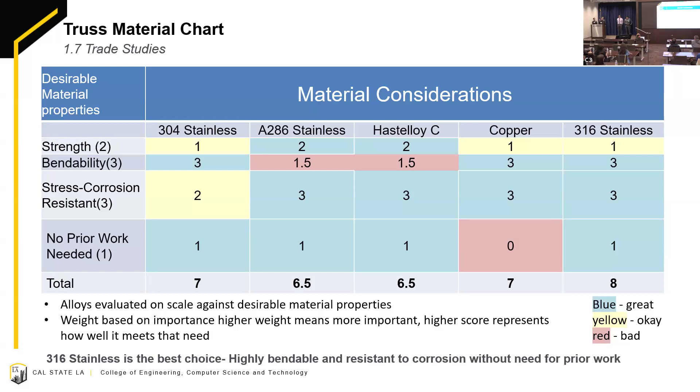So traditional trusses are composed of different members that are connected at nodes. Our design would scrap that and instead have a continuous piece of wire act as all those together. So there would be open nodes, and a pitfall to this is that they would have to be joined since they're open.

But onto the actual products that you can make with this. As mentioned before, you could stack a bunch of cubes together. You can make different 3D shapes such as pyramids. You can make panels, different 2D objects. And this is particularly interesting or important for a small sat factory because it can be scaled up, and depending on what the user wants, you can make more complicated shapes than what is seen right now.

Here is the design for low Earth orbit. So for our moving parts, we opted for mechanisms that are self-contained in some housing, which is titanium. The mechanisms themselves are made out of tool steel, and it is lubricated with molybdenum disulfide, a space-grade lube. Additionally, all mechanisms are run by 2 motors for redundancy, so it can operate to its 6-year lifespan. And outgassing is avoided by design due to the materials.

We go back one slide. Our bender will be protected by its housing made of titanium, very thick, and the outer shell will be protected with multi-layer insulation or a thermal blanket. The spool itself will have its own shielding mechanism that will fold out, and the insides will be protected by thermal pylons to regulate the heat, and phase change material to store and also help with regulation.

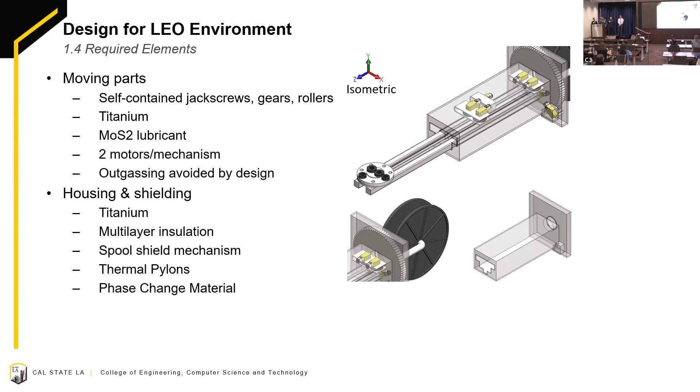Next slide. The multi-layer insulation will come in the layers of aluminum Kapton, Dacron mesh, beta cloth, and tape, also known as polyimide-based adhesive, that will be used to edge everything out and provide a little bit more stability. These materials were chosen based on their resistance to atomic oxygen, their ability to deflect radiation, and very low thermal conductivity. Next slide.

So seen here is a control block diagram, which shows the flow of signal or commands from the user controller to the motors, and the feedback loops are made. So the signals from the sensors are brought back to the controller to make sure that the motors are precisely positioned.

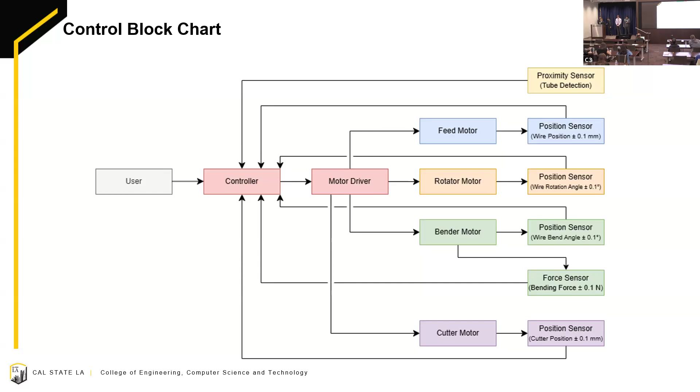In addition to this, we also would be taking temperature readings of the device itself, the wire as it is being bent, and the bending head, as it is far from the main body and will require its own temperature readings. This is to ensure the safety of the system and ensure that it functions properly during its entire lifetime.

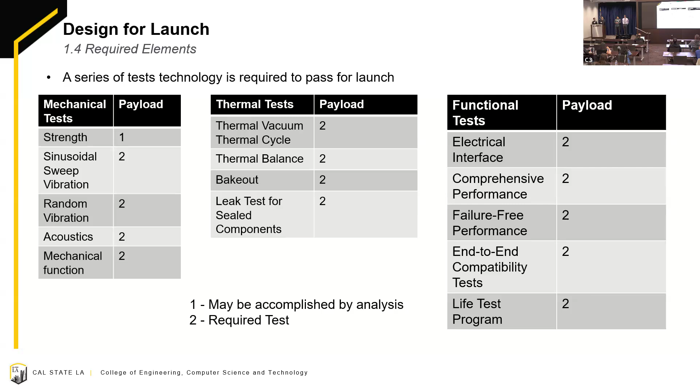So here's a chart showing the technological readiness of different components in our system. For the subsystems, we have a range of TRL ratings. Our bender and cutter mechanisms are at a 4, meaning that the tech has been validated in the lab. Our feeder, rotator, and motors are at a 6, which means the tech has been demonstrated in a relevant environment. And our attitude control and data handling is at an 8, which means the system is complete and qualified. Overall, our system readiness is at a 2, which means we're still at the technological concept level.

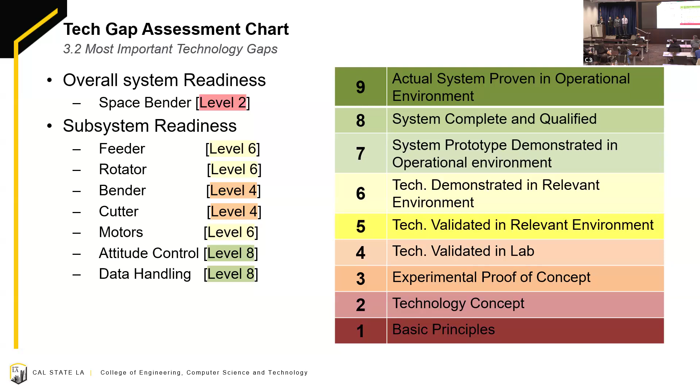As for a bending error, the reason why this goes up to a moderate risk is due to it changing the physical properties of the material due to strain hardening. While we have similar processes for reattempting bending, if that cannot be completed or if it would cause danger to the device, the structure would be removed and the process would then be reattempted from the beginning.

Material contamination would be the material just not being up to our desired standards, including things such as surface contaminations, or perhaps if they were made poorly and are not fully homogeneous. In order to avoid this, we would be doing predominantly quality control testing, ensuring that the material is of a proper quality before it is installed onto the device.

As for our high risk, we have exceeding power requirements and truss impact. In order to avoid exceeding power requirements, we're actually keeping our power usage below half the supplied power of our satellite in the double solar panel configuration. And as for a truss impact, that would be the structure we are constructing coming into contact with the satellite or the payload. In order to avoid this, we have our extender, which extends the truss far out from the main body, ensuring that it cannot come into contact with the system as it is being fabricated.

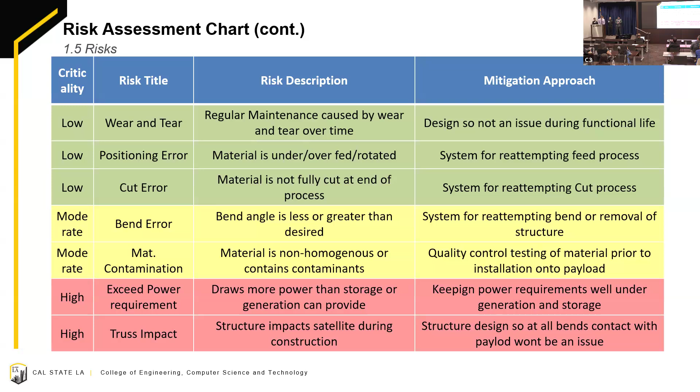Next. These are our 3 most innovative concepts. The first one was the use of a stainless pre-notched tube, which bends at precise points to make structures. We didn't go with this plan because we couldn't find a way to load the material into the bender, and also we had concerns with the structural integrity of the notches.

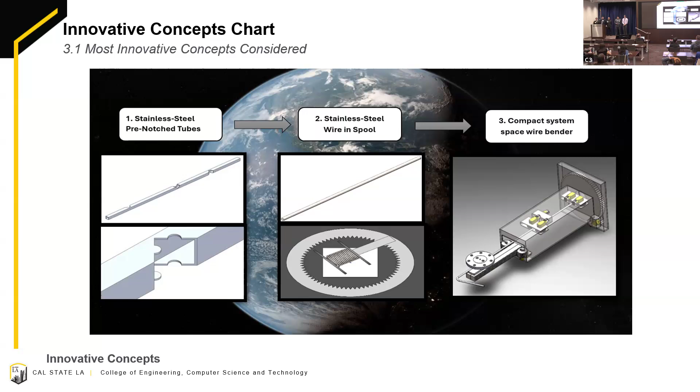And that allowed us to think about a solution, which was the use of a stainless steel spool, and that allowed us to have continuous feeding in one load. Our third concept is our bending system itself, because it's a compact system that allows us to bend in space and build structures.

The biggest challenge during our project was that initially we thought too big. We wanted to have robotic manipulators to help assist in the bending process. However, when we went through the idea, it surpassed our volume restrictions, our power requirements, and the heating would be such a huge problem that we can't multitask that much.

So we pivoted away. We had considered friction stir welding to be added in this process to add structural integrity to the builds. However, again, the power restraint came up again, and heating was also going to be a problem. So we pivoted away once again. We then settled on a bender. We started considering more on the volume, and that's when we had to reiterate and modify that design, and that's where we are now. Next slide.

We also need very specific software, as while CNC software for similar machines does exist, they do not function or have the requirements for the same environment that we are doing it in. While robust attitude control systems also exist, hence our 8 on our technology readiness level, they have not been implemented on this design specifically and thus would need to be researched to be used properly. And then lastly, as we have talked about many times, the joint securement method, ensuring that these have the proper strength required by securing each of the joints where a bend has taken place.

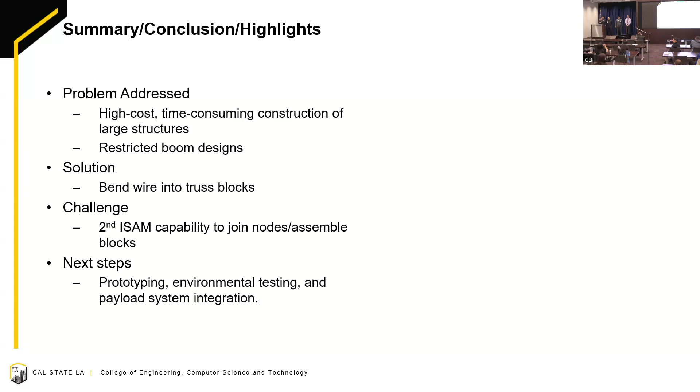Additionally, the payload itself is a small footprint, mass and volume-wise. Lastly, this technology can be integrated into planned ISAM ecosystems, such as the small sat factory, and can complement key manufacturing technologies such as fused filament fabrication to fab these small sat structures. We will now open the floor to questions.

Okay, do our judges have questions? I really like your simple, it's innovative and simple. That's why I like it. Question I have for you. Have you thought about how you will join the locations where you have no connections? Have you put some thought into the various approaches that you may go about it?

So we have looked into a few different methods for joining the joints. As we mentioned in our challenge section, we looked at friction stir welding to join these joints. However, it exceeded the power requirements and the heat production requirements for our specific satellite. We also looked into securing the system with something like zip ties, but again, we just didn't have the excess power with keeping the power consumption low on our device. With this in mind, we decided it would be better to have a secondary satellite that would finish the construction and fabrication on these blocks once they have been bent into place to ensure that they have their stability.